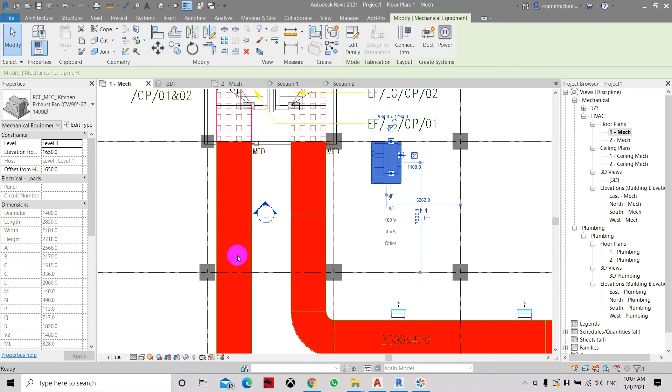Now continuing on, we have this ventilation fan family which we have downloaded. Let's look at it. Here the current elevation is, let's set it to 0 because it should be floor mounted, and let's move it into position.

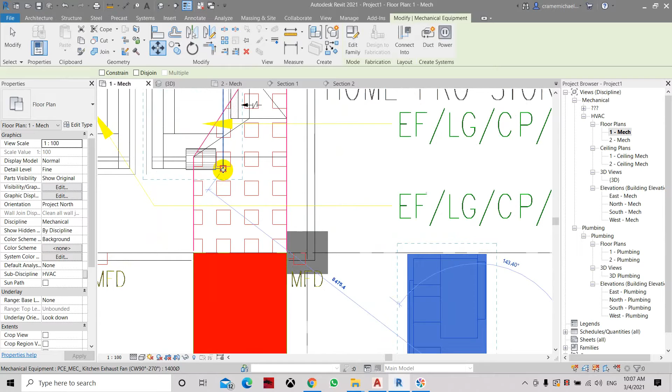Currently it's supposed to be this way, which is just nice, and we have to mirror it from the other side, so let's mirror it using this reference. Now let's move it into position, in the corner. So now we have it in position.

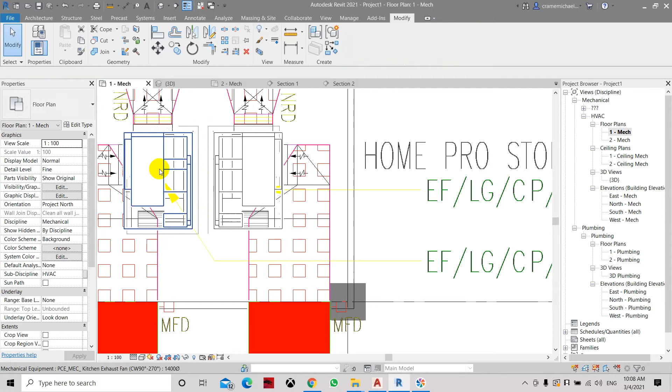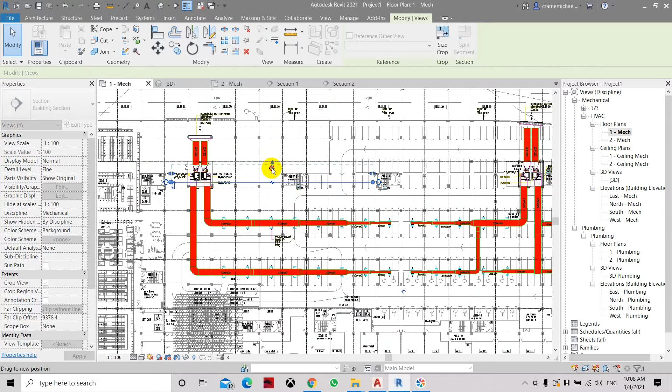So now we have to connect the ductworks from this equipment and make all the connections. Let's move this section internally so we can, and let's use the crop view to see inside the panel, otherwise you will be seeing outside. Here we have the section, here is the duct, and we have to make some connection.

So now basically they have the duct as 1400 by 1400, so let's have the duct connection from here. We will do it on the side and move it up from there. So here we have a ductwork.

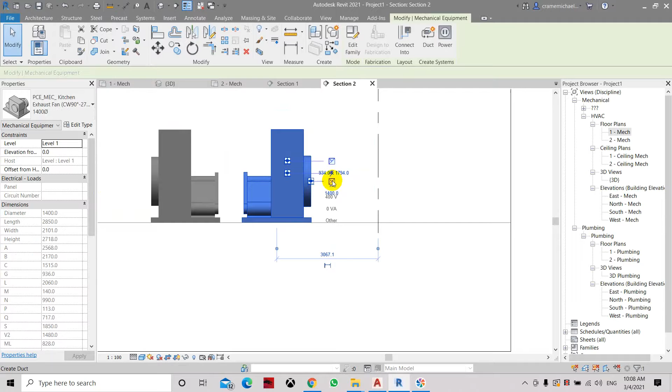Let's have this connection. Have the space inside the panel, and let's make a 90 degrees up vertical. So it cannot, because of the limitation in the radius or the elbow.

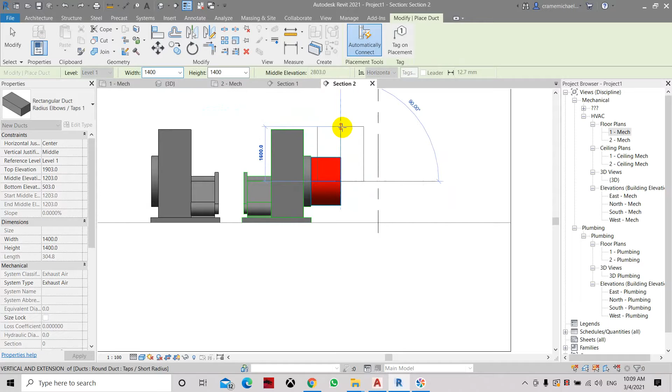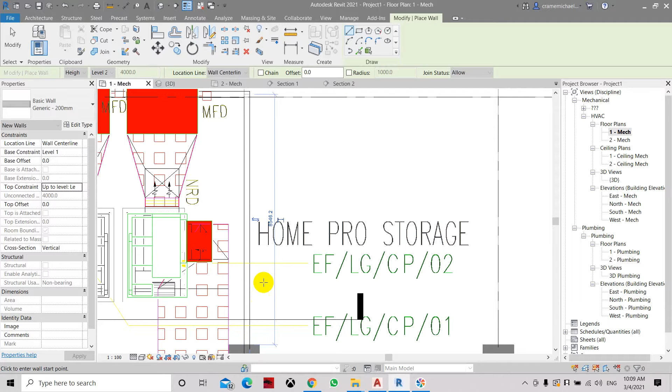So one thing we need to be careful is the wall here. So let's place the wall first so we can see it clearly. Let's do some architectural wall and place a wall which is about level 2 here. So that's the wall. Let's go back to the section and let's just see the final position.

So here's the wall. So we still have some extra space. Let's continue with this, extend this. Or let's erase it and do it again, start from scratch.

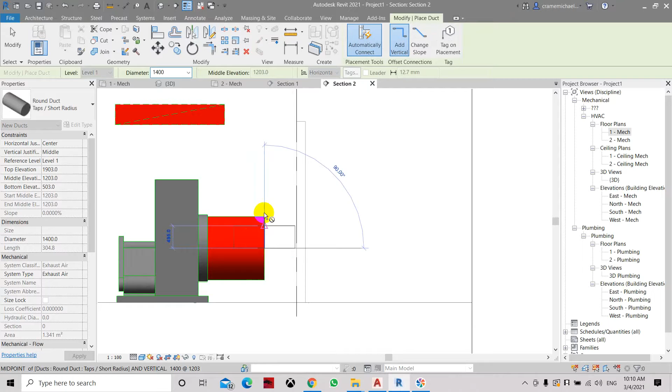Let's make a 90 degrees up. Cannot. Okay, what we can do is make this connection between the round and the elbow, and let's set a 1000 by 1000 duct in front of it, just like this one.

Drop, and let's see the dimension from here. Let's go to the modify. This is 1400, so we have to create a 1400 by, or 1500 by 1500 duct.

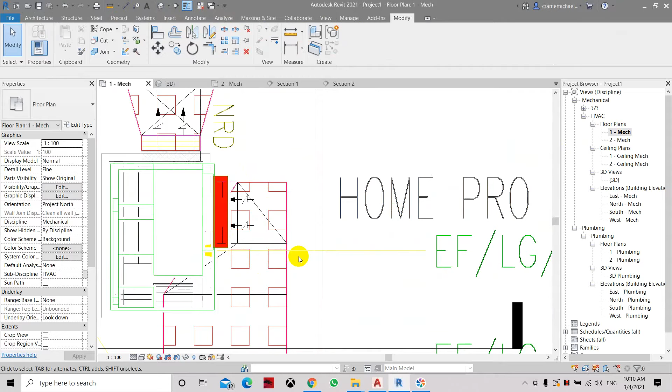Here we need to go to that, and let's set it as tap shape 1. So let's set it as taps. We don't need the different elbow. So the duct size will be 1500 by 1500.

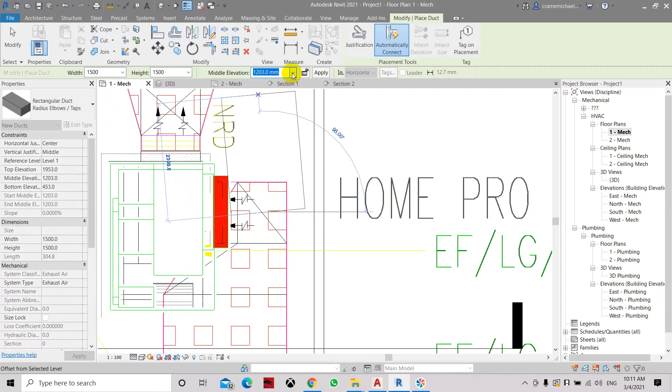And let's set the elevation to 300. Click apply, then we will create 1500 by 1500, and then let's set the middle elevation to 4 meters. Click apply and click apply.

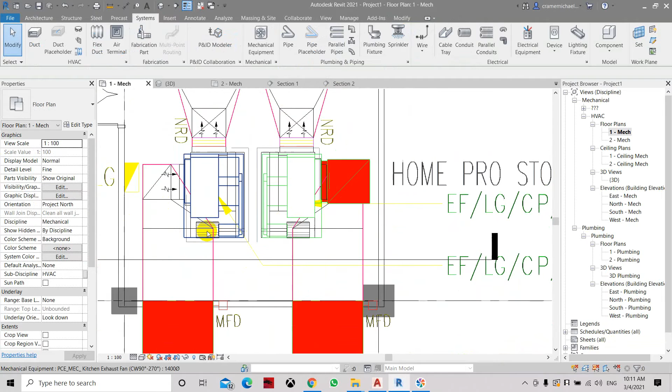So now we have created a riser. What we did is to create a riser. Let's cut the section again, and here it is. So it's not perfectly aligned, but we can still push it down.

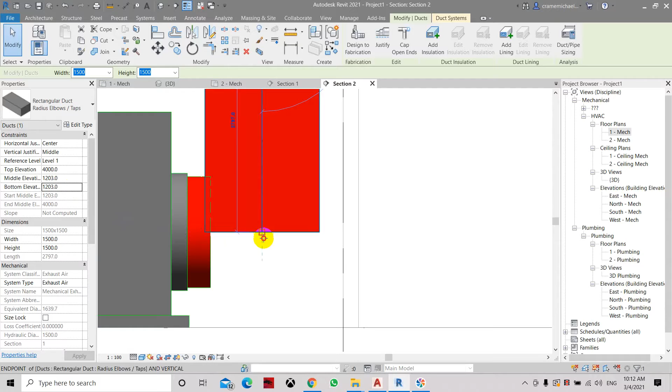Okay, so let's set this to, elevation is about 1.2. So let's set the bottom elevation to, you can actually push it down. Create elements.

Okay, so now we can actually tap this duct into this duct. So but let's move this duct first. Let's move it away, at least close to the wall, so we have some space.

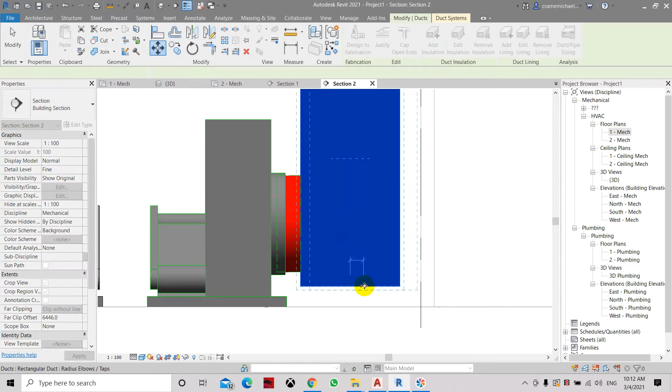So now this duct is actually not connected to this duct. We can have it connected using a direct tap. So now it's tapped to this riser, and now we can move it.

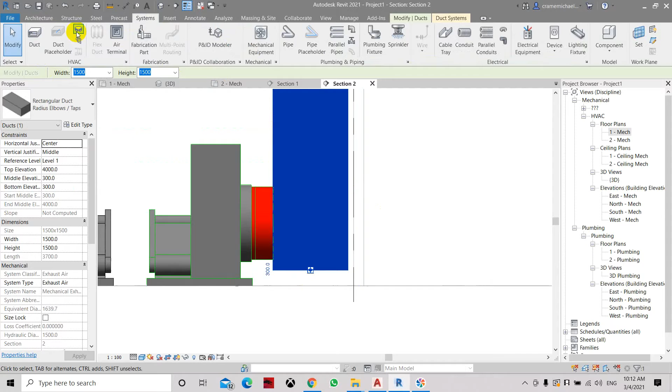Here we need to place an end cap. System, duct, fittings, standard end cap, and close this part. So the air will transfer here, and this is the connection.

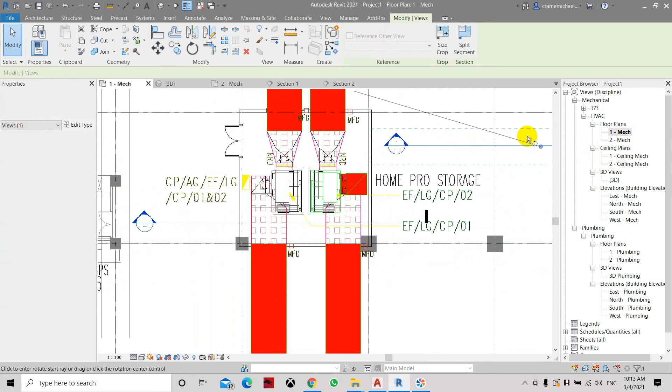Now we'll have it here, and then let's connect this duct to this duct. So we need another section. Let's copy this section and let's rotate it 90 degrees.

Let's move this into position and let's cut the section. Now you can see the duct works, and the position of the ducts is somewhere here.

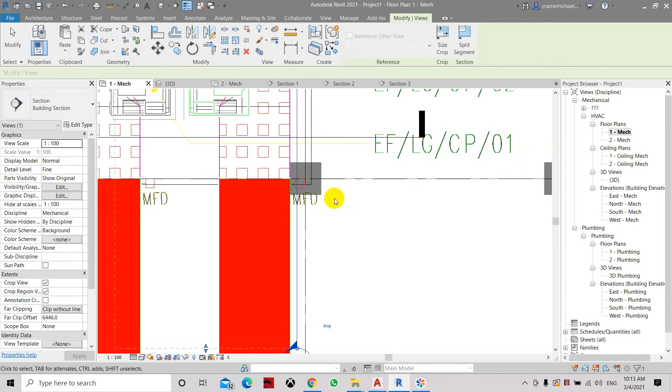Why is it not cutting? Because you can see from here to here, and it's roughly close to this edge. So let's move this line.

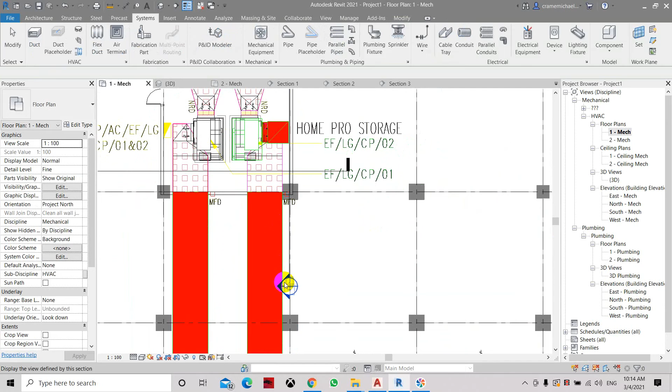Let's move the section until we have made some contact with this, so you can see this duct. Let's cut the section again, and now we can see the ductworks.

So from 2.5 it has to connect. One way of connecting it is actually making this 2.5 by 5 bend and then connect back. So let's try to connect it with a trim, here. Let's see how it's going to be connected.

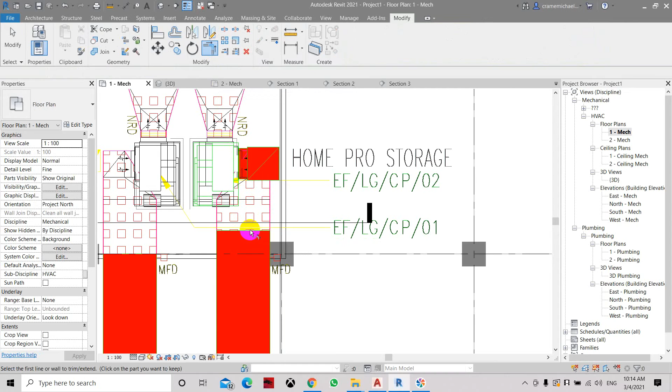Now the system doesn't have that connection for the ductworks. So one way of connecting this system is using a transition with an elbow. We have the height, so let's create the elbow first.

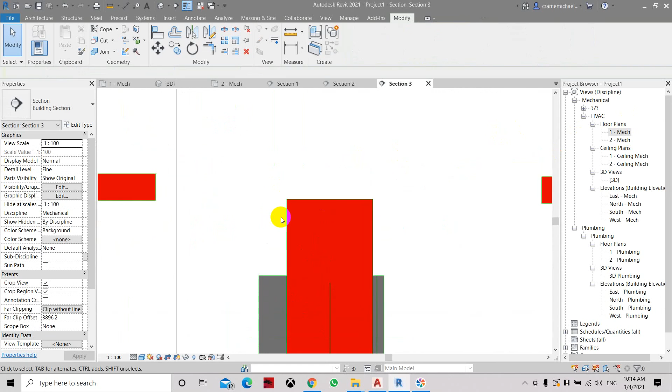We know our bottom of that is 4 meters. So let's create that. This is 1.5 by 1.5. So let's create a duct which is 1.5 by 1.5.

Let's go to mechanical here. Let's see if I offset here. It's a little bit tricky. Okay, let's just go 1.5, 90 degrees, and then transitions to 2.5, it will flush.